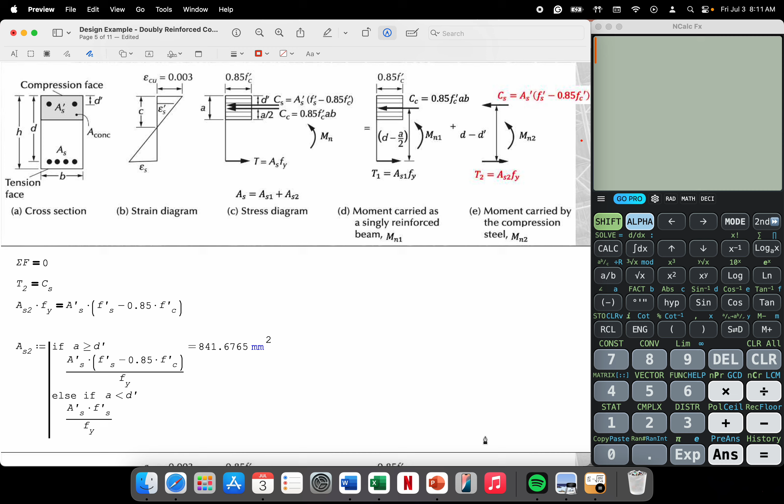For this time, ang isosolve naman natin is yung AS2 by considering the moment carried by the compression steel, itong diagram na to. Di ba previously nasolve na natin yung AS prime? So, ang gagawin natin, we're going to sum up our forces such that yung T sub 2 will be equivalent to our CS prime.

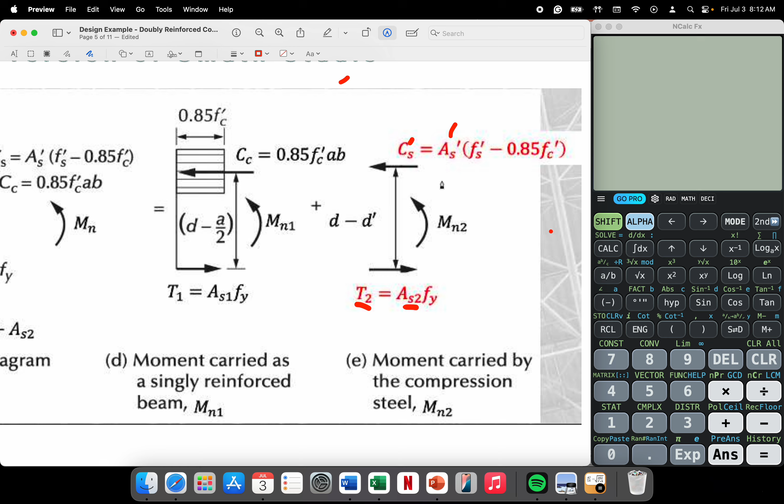So, ito yung ating equilibrium equation. Summation of forces equivalent to 0, T sub 2 is equivalent to our CS prime. So, AS2 times Fy will now be equivalent to AS prime times Fs prime minus 0.85 Fc prime. Again, magbabawas lang tayo ng 0.85 Fc prime sakali na yung A natin is greater than our D prime.

So, to solve for our AS2, yung AS2 natin times yung ating Fy, which is equivalent to 420, will now be equivalent to AS prime. Yung AS prime na nasolve natin previously is 1063.818, times yung ating Fs prime. Yung ating Fs prime naman is 356.0976, minus yung 0.85 times yung Fc prime na 28.

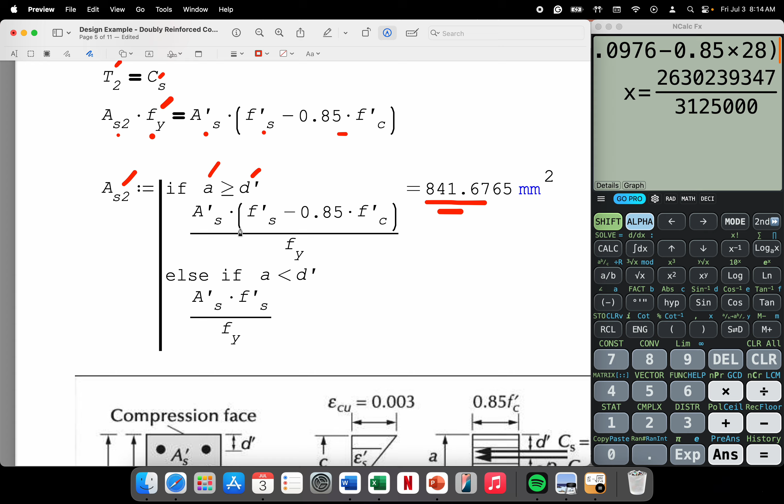So, yung makuha natin na value is 841.6765 square millimeters. Ito na yung ating AS2. So, since nasolve na natin yung AS prime tsaka yung AS2, masosolve na rin natin yung ating total na AS. Itong AS, take note, ito yung total na area ng steel sa ating tension.

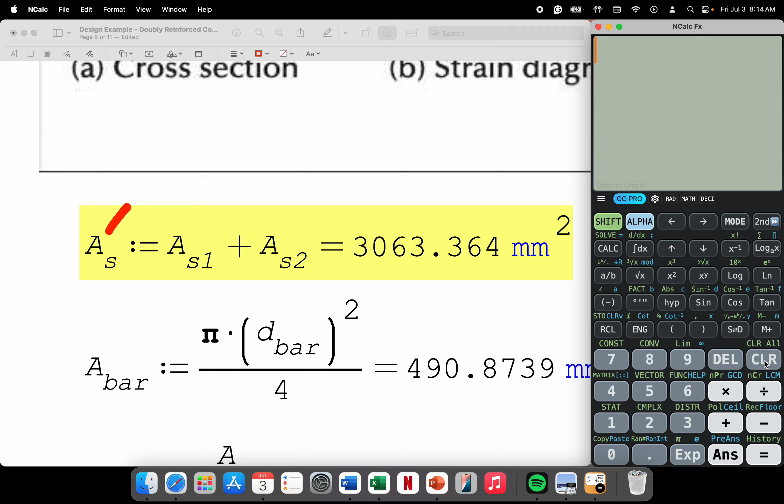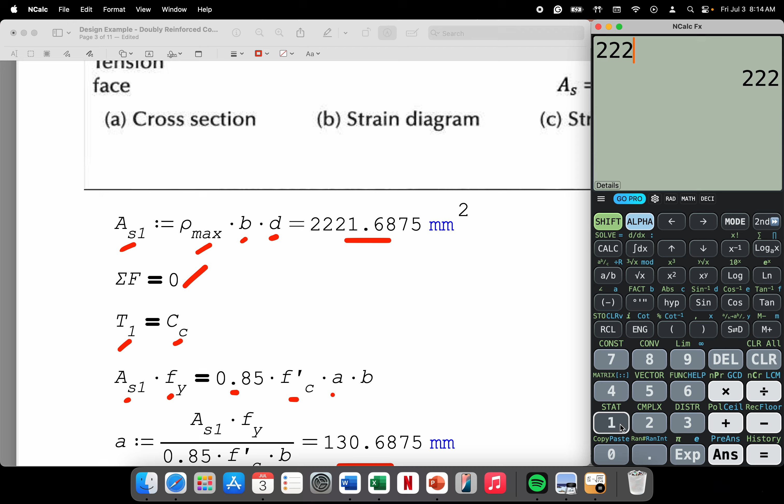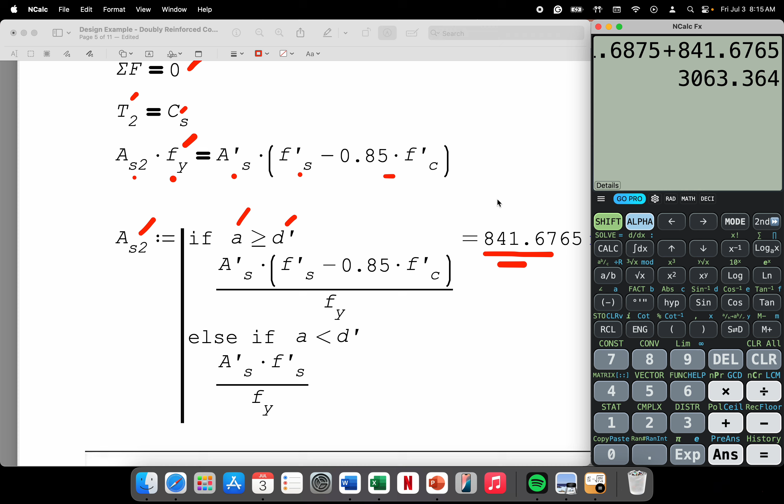So, yung AS1 natin, ito yung area ng steel by considering na maximize natin yung ating steel reinforcement. Check natin ulit yung AS1. Yung AS1 natin is 2,221.6875 plus yung ating AS2 na 841.6765. So, therefore, yung total na required na area para sa ating tension bar is 3,063.

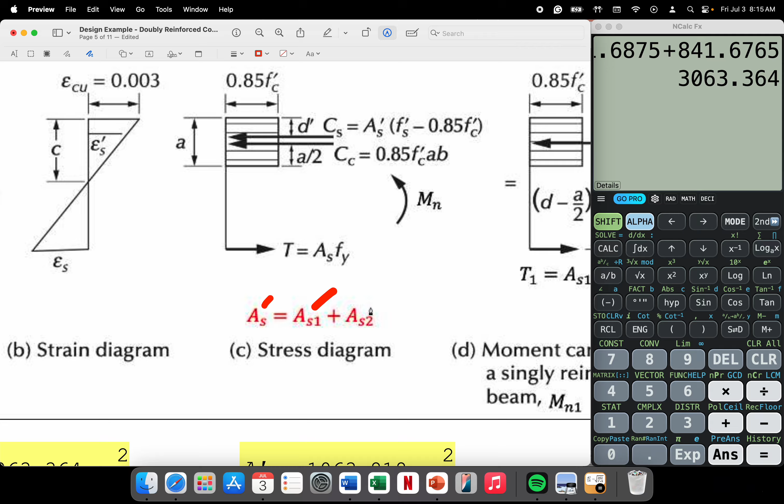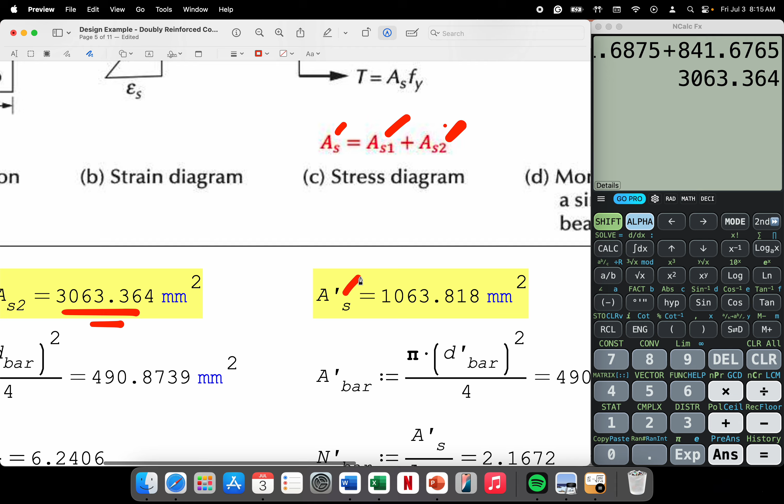So, ito yung explanation. Yung total na AS natin is equivalent to AS1 plus yung ating AS2. So, we have 3,063.364. Yung AS prime naman, ito yung ating required na steel area para sa ating compression bars, and this is equivalent to 1,063.818. After nito, we're going to solve yung area ng ating bar. Pi d squared all over 4. So, we have pi times 25 squared, yung bar diameter na given sa problem, divided by 4. We'll get 490.87385. The same din to sa area ng each bar sa compression bars natin.

So, next is to solve yung number ng ating tension bars. Yung AS natin na 3,063.364, i-divide na lang natin to ng area ng bar na 490.8739. Yung makakalculate natin is 6.2406. If we're going to round this up, ito ay magiging 7 bars. So, ito na ngayon yung total na number ng ating tension bars.

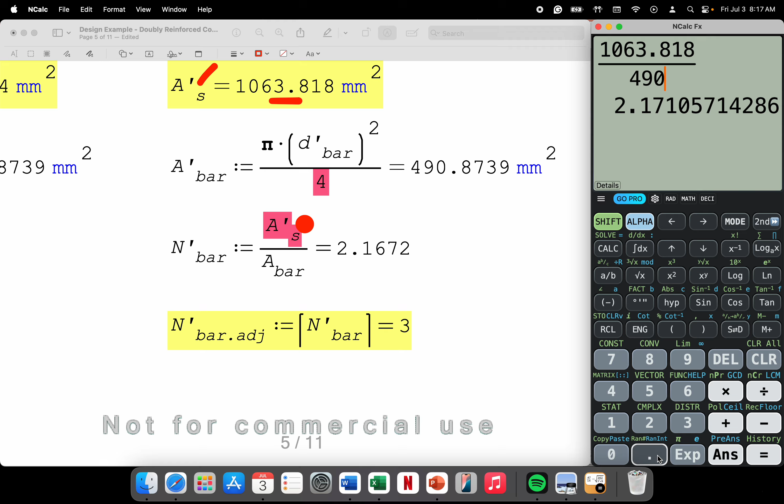Sa ating compression bars naman, yung AS prime natin, which is 1063.818, i-divide na lang natin sa area ng bar na 490.8739. Yung makalculate natin is 2.1672. I-round up na lang natin to. Magiging 3 na yung ating bar.

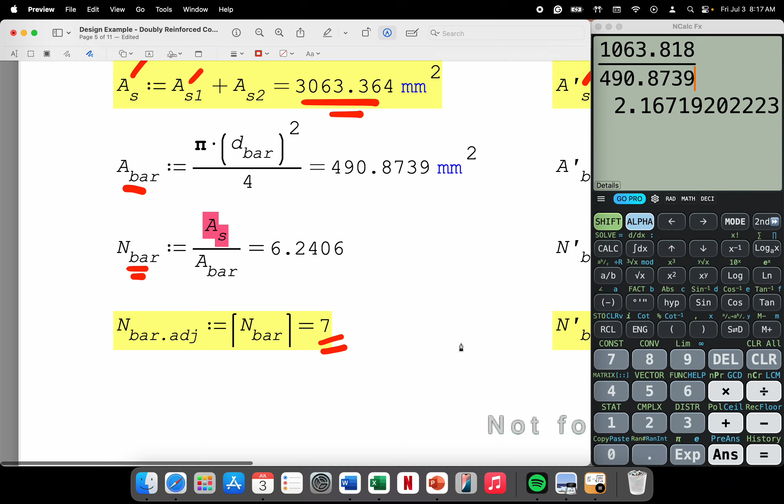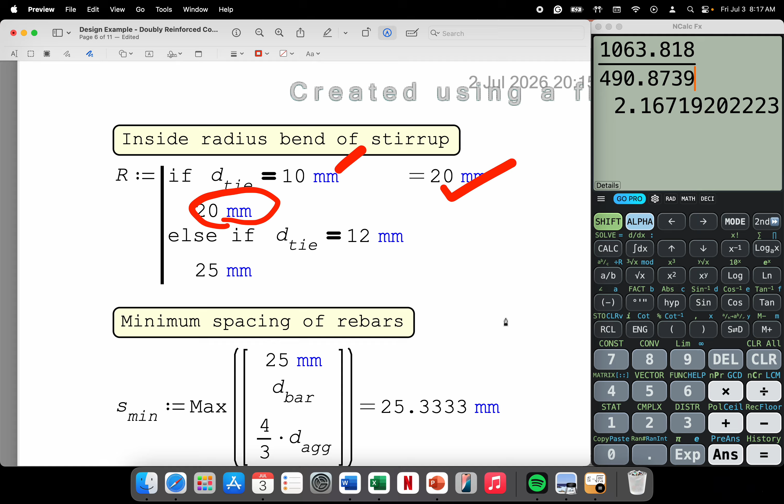After nito, we're going to counter-check if yung 7 bars ay kakasya ba sa isang layer, which I doubt. To check for the clear spacing, first na isosolve natin is yung inside radius ng bend ng ating stirrup. Since the diameter ng tie natin is 10 millimeters, yung inside radius bend natin shall be taken to be 20 millimeters.

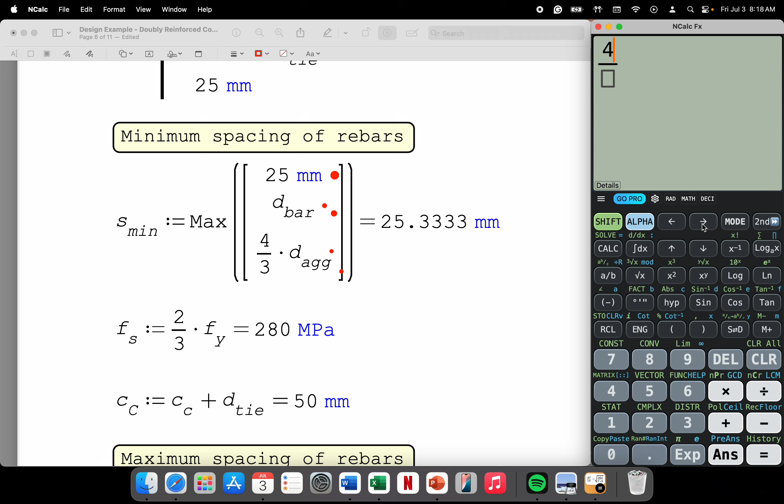Also, to solve for the minimum spacing ng ating rebars, it should be the maximum value among these equations: 25, diameter ng bar, tsaka 4/3 ng diameter ng aggregate. 4/3 times yung diameter ng aggregate na 19 is equivalent to 25.333. So ito ngayon yung ating minimum na clear spacing.

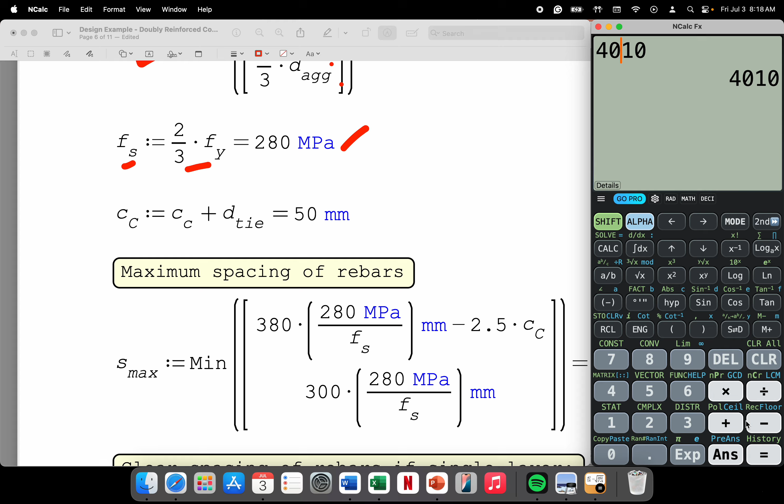To solve naman for the maximum spacing ng bars, yung Fs natin shall be taken as 2/3 ng ating Fy. 2/3 times yung Fy na 420 is equivalent to 280 megapascals. Then yung C sub C is taken to be 40 plus yung diameter ng tie natin na 10. That's why naging 50 ito. After that, isi-solve natin itong value. The minimum between these two equations ang mag-govern ng maximum na spacing natin.

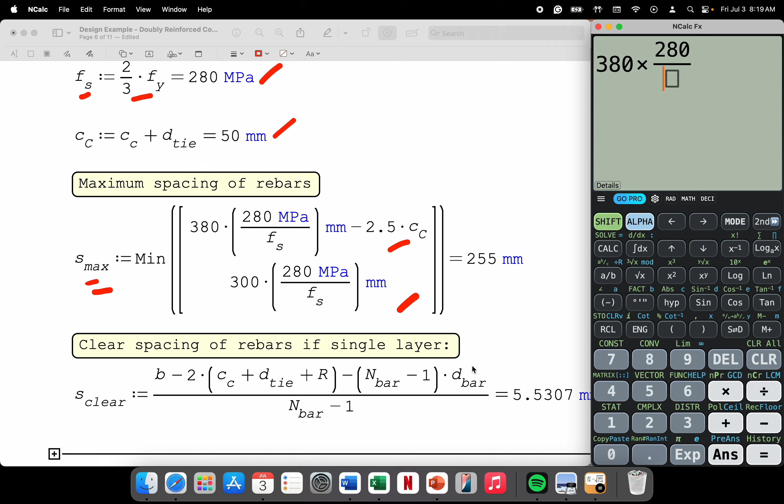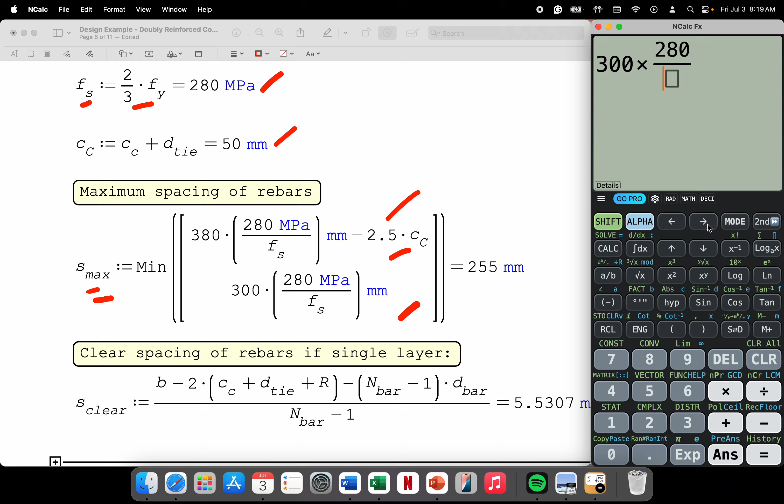So we have 380 times 280 divided by yung Fs na 280, minus 2.5 times yung CC na 50, equals 255. Yung next na equation naman is 300 times 280 divided by yung Fs na 280, equals 300. So, yung minimum is 255. Therefore, ito na ngayon yung mag-govern na value.

To check for our clear spacing, ito yung gagamitin natin na equation, taken from ACI. We have yung B natin na 300, babawasan natin ng 2 times yung C sub C na 40 plus yung diameter ng tie na 10 plus yung inside radius na 20, minus number of bars natin, 7 minus 1, times yung bar diameter na 25, divided by 7 minus 1.

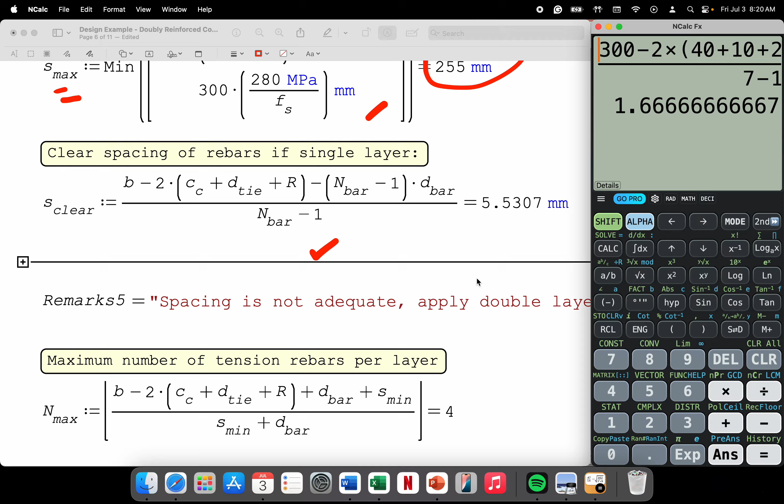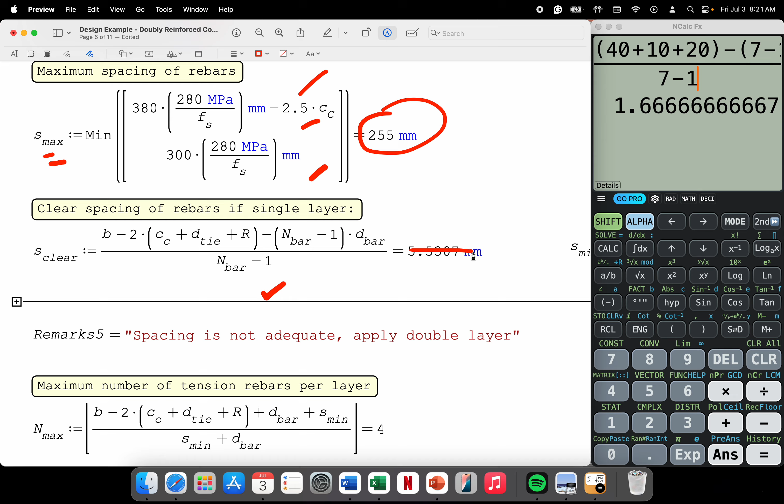Check ko muna kung may mali sa equation ko. So, 300 minus 2 times C sub C na 40 plus 10 plus 20, minus 7 minus 1 times bar diameter na 25. May mali dito sa PDF. This should be 1.6667. Pero yung point lang dito is that it is less than 25.33. So therefore hindi pwede yung single layer. That's why na-state sa problem na dapat double layer yung gagamitin.

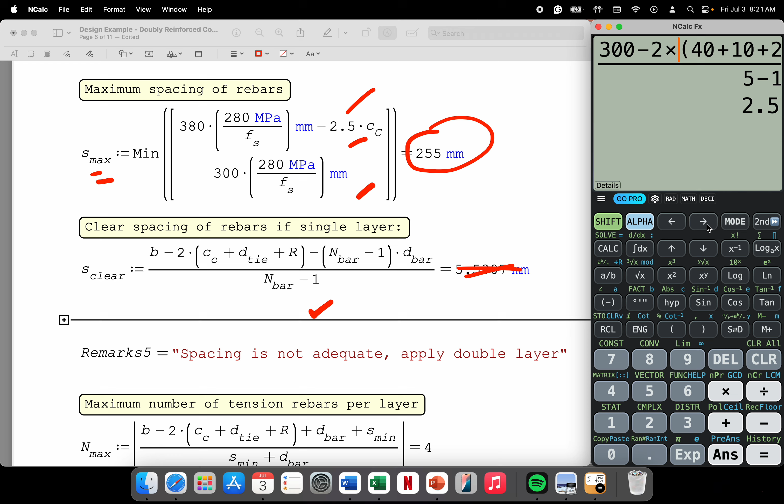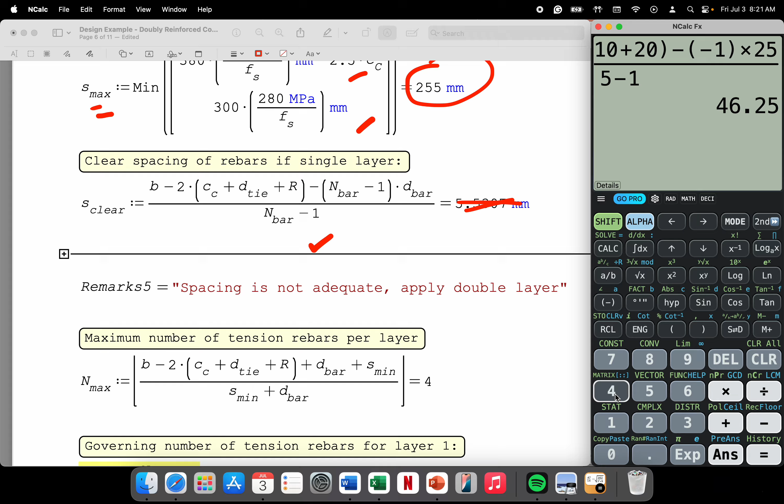So check natin if kakasya yung 5 bars, for example. Unfortunately, hindi pa rin pasok yung 5 bars. That's why kung i-double layer natin, maximum of 4 bars per layer yung gagamitin. Kasi yung clear spacing natin is 28.333, which is greater sa minimum na clear spacing natin na 25.333. So therefore, adequate. Sa first layer natin, 4 bars yung gagamitin.

Then for the second layer, kasi meron tayong 7 na number of bars, 7 minus 4 will get 3. Itong 3 ang number of bars natin sa second layer. Kung i-check natin yung clear spacing, 55 yung masasolve, which is greater pa rin sa minimum. And then sa compression bars naman, we have 3, for which yung clear spacing is 55, greater pa rin sa minimum.

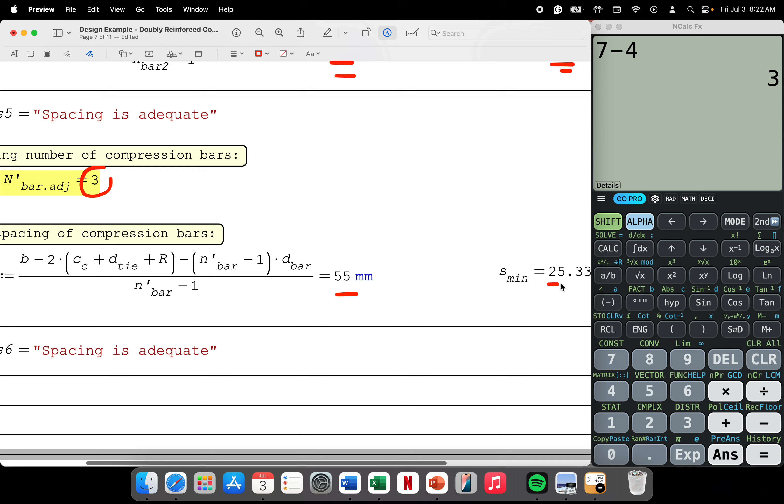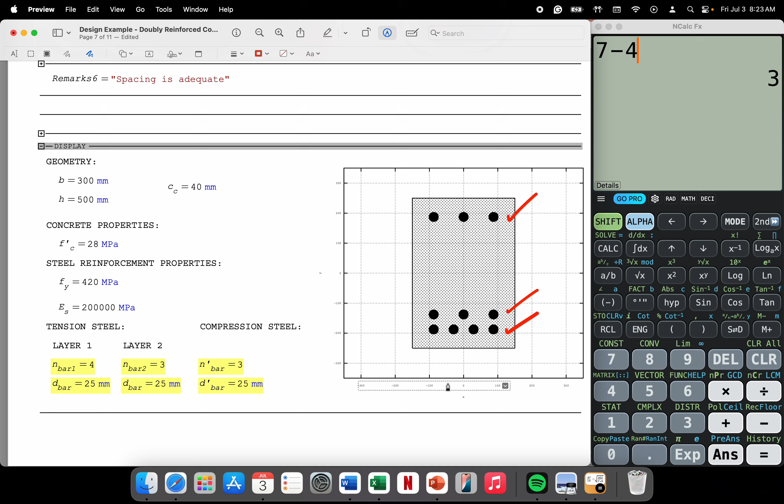So, spacing is adequate. Yung final na output natin ngayon is ito na, yung detailing ng ating doubly reinforced na beam. Sa first layer, meron tayong 4, sa second layer, 25 mm diameter. Sa compression bars naman, 25 mm diameter. So ito na yung output for our design ng doubly reinforced concrete. Yung next na i-discuss natin is yung investigation ng doubly reinforced concrete beam.